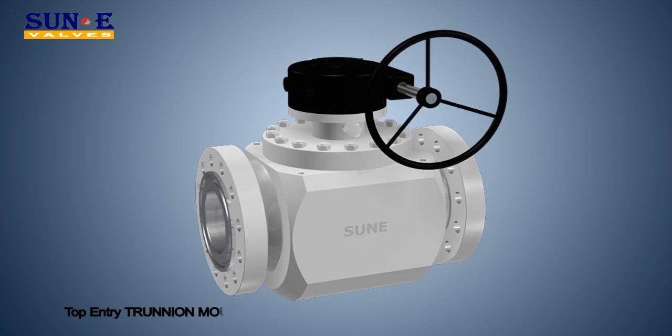Side entry and top entry trunnion mounted ball valves. SUNE designed these valves to assure bidirectional sealing with two independent floating seats. The design of these seats minimizes the torque required to operate the valve without losing sealing power. This power is assured by zero differential pressure to the valve's maximum rated pressure.

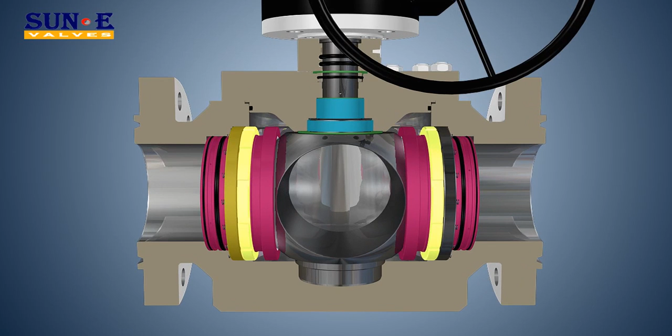In addition, SUNE valves are manufactured to seal off both seats at the same time and to allow bleeding of the entrapped cavity pressure, DBB, with the ball in the closed position.

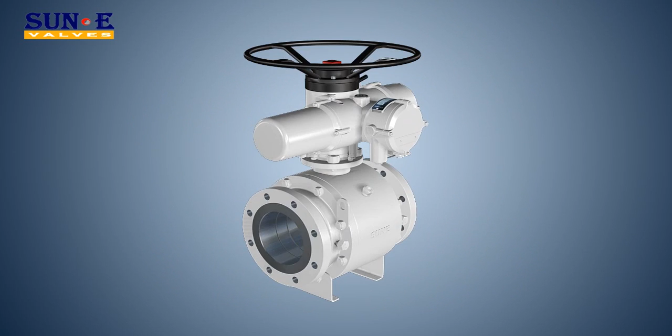Side entry ball valves are available either in 3 pieces or 2 pieces, bolted construction, full and reduced bore. Top entry ball valves are produced in 1-piece forging or cast body, bolted cover, trunnion mounted ball, full and reduced bore.

Size from 1.5 inches to 60 inches. ANSI rating class 150 to 2,500. API pressure rating 2,000 to 10,000 psi.

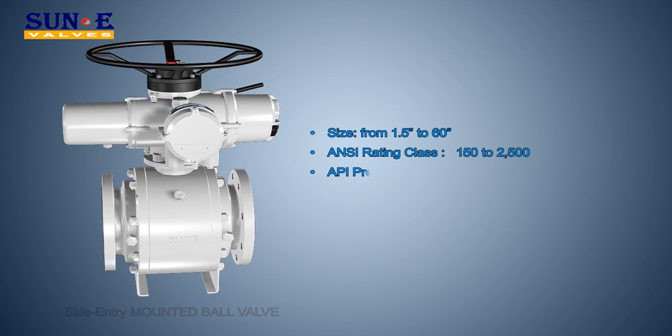Standard features: trunnion mounted ball. Features a fixed ball and floating seat rings. Bearings absorb the side load generated by the pressure acting on the ball.

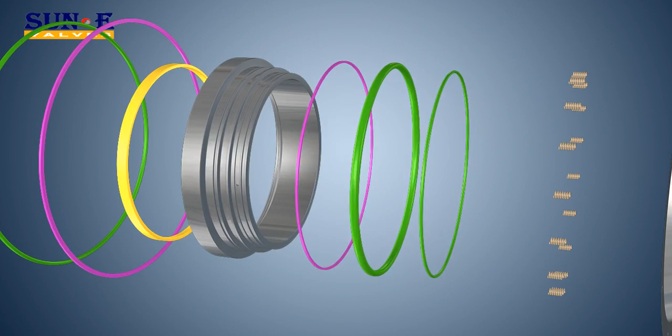Soft-seated valves: in valves designed for standard service, a resilient material is inserted into the metal seat holder to provide a soft seating action in addition to the metal-to-metal seating between the ball and seat rings.

Self-relieving seat rings: 2 seat rings assure bidirectional sealing of the valves. Lower torque design allows ease of operation.

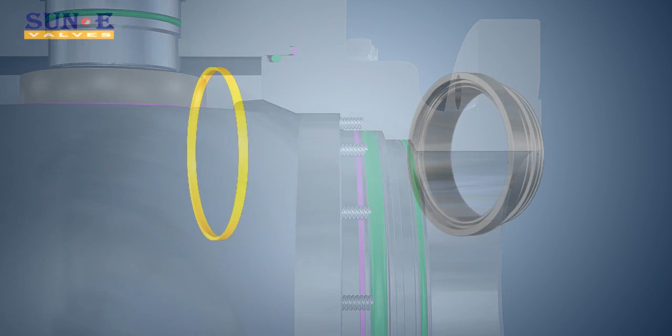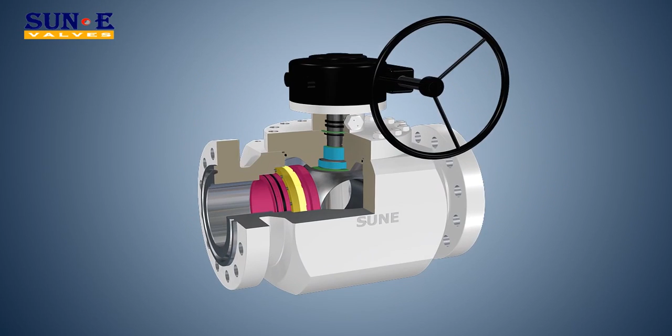This is due to the technical superiority of the seat configuration design, and the ball is mounted on trunnion or supported by plates with low friction bearings to reduce torque, so the user will save the cost of the actuation.

Pressure drives the upstream seat into the ball. The ball remains stationary. Double block and bleed design, API 6D.

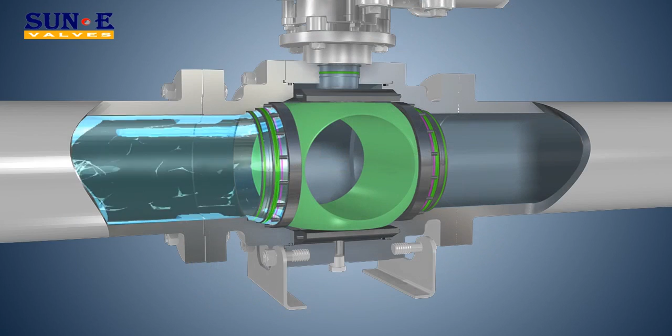Upstream and downstream seats isolate the cavity. The pressure in the cavity can then be relieved to prove the integrity of the seats.

Anti-static device: anti-static continuity between body, ball, and stem is provided by a spring and a ball.

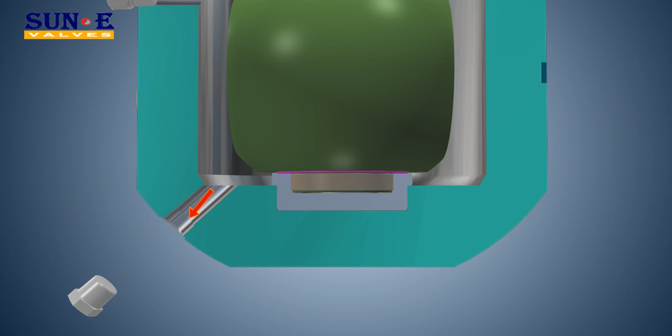Fire-safe design: this may substantially prevent leakage through the elastomeric or polymeric seals when exposed to high temperatures of fires. Upon request, we can provide a fire-safe design which can pass fire tests conducted in accordance with BS 6755, API 607, API 6FA.

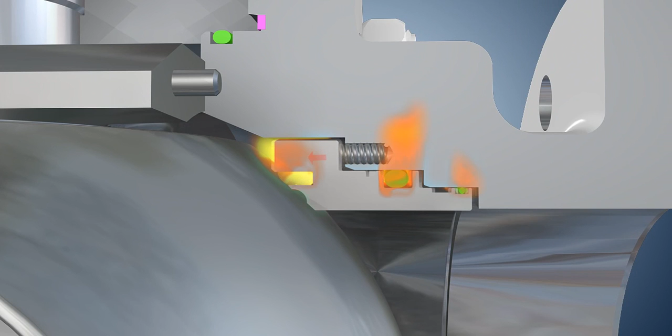Body vent and drain: the valve body incorporates a drain plug, located at the bottom of the cavity, and a bleed valve located at the highest possible position of the cavity.

Top entry trunnion mounted ball valves are widely used to ensure that inline repair can be truly realized. Emergency sealant injection for stem seals and seat face.

If the seat seal becomes damaged, the emergency sealant injection system may be used to temporarily renew the seal until the repair can be scheduled.

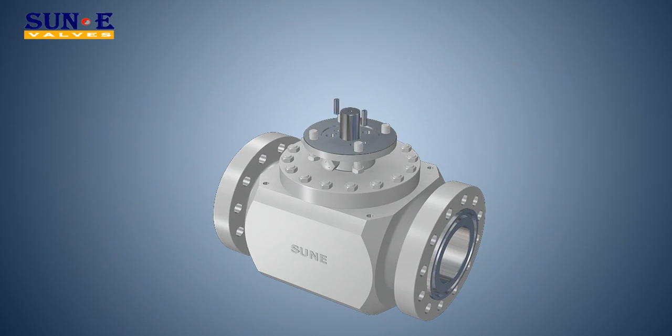Single piston effect and double piston effect seats. Single piston effect is a design whereby the excessive internal body pressure is automatically relieved either into the upstream or downstream line by forcing the seats away from the closure element.

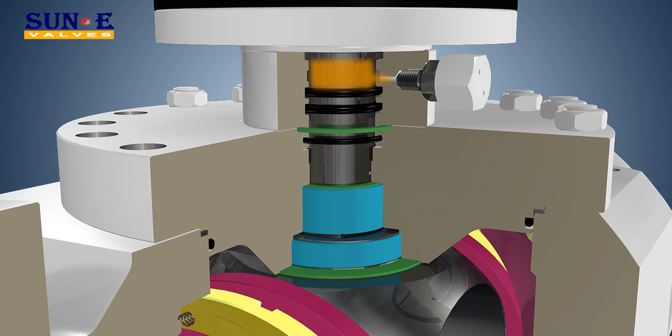Double piston effect is a design whereby pressure in the cavity energizes the downstream seat and affects a downstream seal. DPE seats result in a double barrier within a single valve.

Valves in liquid service with DPE seats must pipe away the cavity pressure to the upstream side of the valve to prevent damage from thermal expansion.

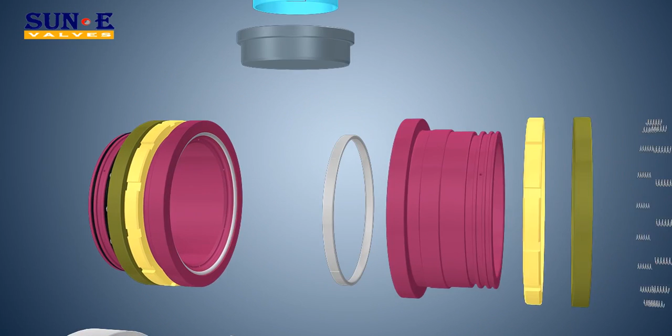Metal-seated valves: the metal-to-metal seal is obtained by means of a flexible seat with the ball and seat sealing surfaces coated with tungsten carbide. Metal seats are typically used in potentially erosive or abrasive service caused by the presence of solids.

Extended stem and fittings for below-ground service. A stem extension is required for underground installation or for valves which are not easily accessible.

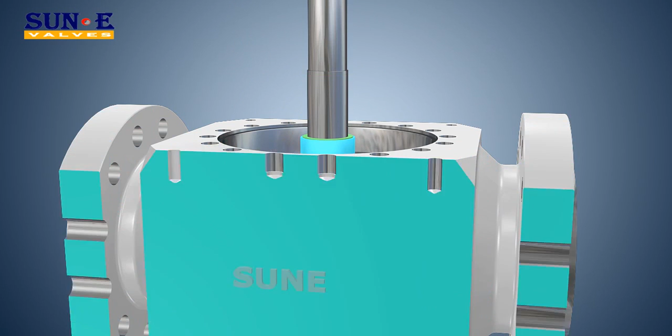A variety of stem extensions for manual, gear, or power-assisted operation may be offered. Also available are piping and fitting extensions for gaining access to body vent, body drain, and the emergency sealant injection fitting.

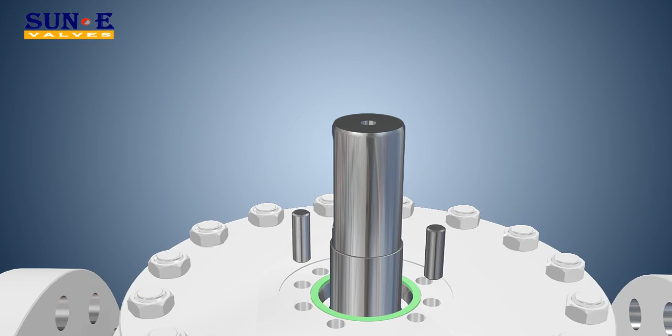Numerous types of body, trim, seal area overlay, and seal materials are available.

Sun-E have applied the scientific design philosophy to manufacture various parts of ball valves. The main parts cover body, ball, stem, seat, etc.

With this concept, Sun-E can ensure the highest level of parts interchangeability, so that we can make certain a good manufacturing quality as well as a quick delivery.